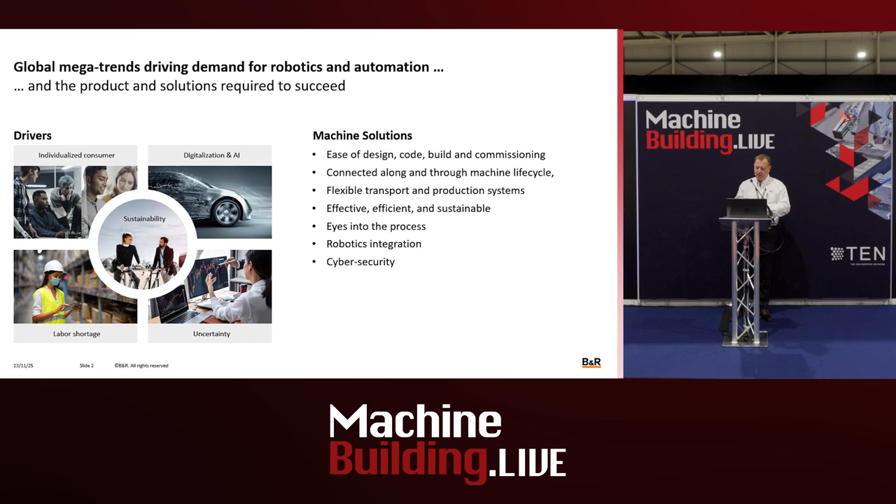So when we talk about along the machine lifecycle, we talk about from a blank sheet of paper, the design of that machine, what that looks like, how it uses raw materials through the entire life of the machine and how long it lasts. And then in the vertical connected through, the machine is part of a line, is part of a factory, is part of an entire ecosystem. And the kinds of data and information exchange that go along with all that, and how do we contextualize it and make use of it and analyze it to make the next set of machines better.

We talk about flexible transport systems. I already mentioned there a little bit tongue-in-cheek about the 6D system from B&R being the coolest piece of technology here. But it's things like that.

It's that kind of technology, these intelligent transport systems, which are very, very flexible and integrated as a part of the process of the machine, to get away from doing something on this machine here, then moving it to another machine to do something else, and then moving it again. What we want are transport systems that become part of that overall process and give you more flexibility—do more with less, quicker.

We also want to have more visibility into the systems these days. We want to know what the machines are doing, and whether we're at the optimum productivity of each piece of equipment. It's not just simple system information like is it running, how many parts are good or bad. It's how long has it been running at that level? If parts are bad, why are they bad, and does somebody have to intervene, or can the machine understand the problem, sort itself out, and quickly respond to be self-supporting and self-healing.

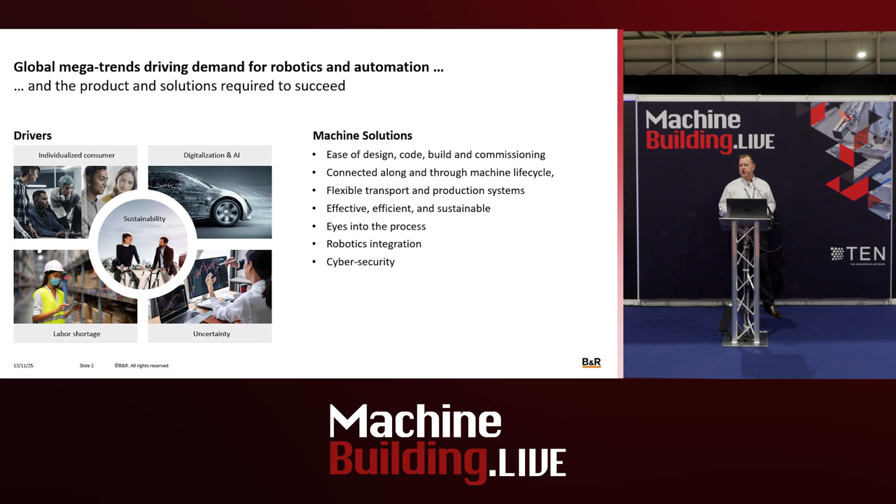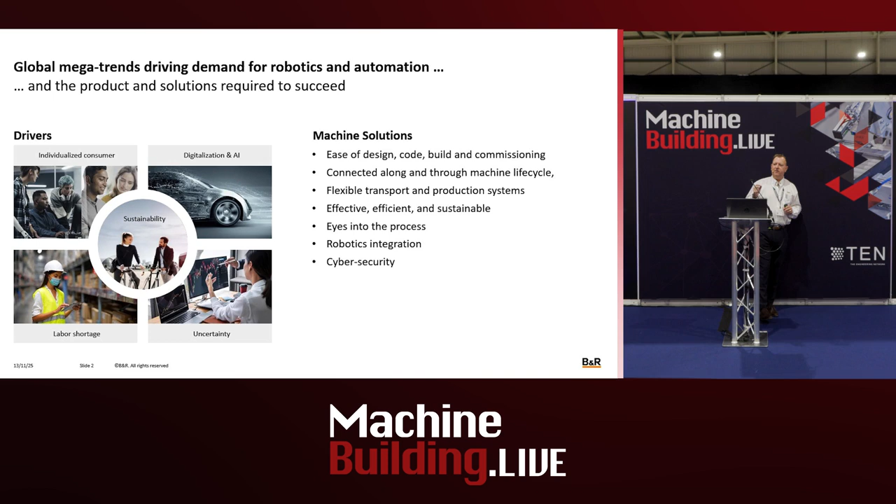We've seen cyber attacks in many forms, most recently the JLR one. Before that this year we've had the Co-op hit, and Marks and Spencer's hit. The impact is huge. Someone said to me at a show similar to this earlier in the year, yeah, but it's a machine, people don't attack machines to get bank details. No, they don't. But if you've got a production line producing pharmaceuticals, producing medicine that's keeping people alive, and people want to be malicious and say, we've hacked into your machine and we're changing the recipe for that product, you can no longer guarantee the product going out the door is what you think it is. That's far bigger than whether they get my bank details or not.

So what are mechatronics? A mechatronics solution is basically an integration of all the disciplines we've known and loved over the years: electrical systems, mechanical systems, robotic systems, computer engineering, high-level data integration, vision systems. That entire ecosystem is a mechatronic solution. It becomes one when those things are brought together in one environment and treated as a single system rather than things bolted together to make it work.

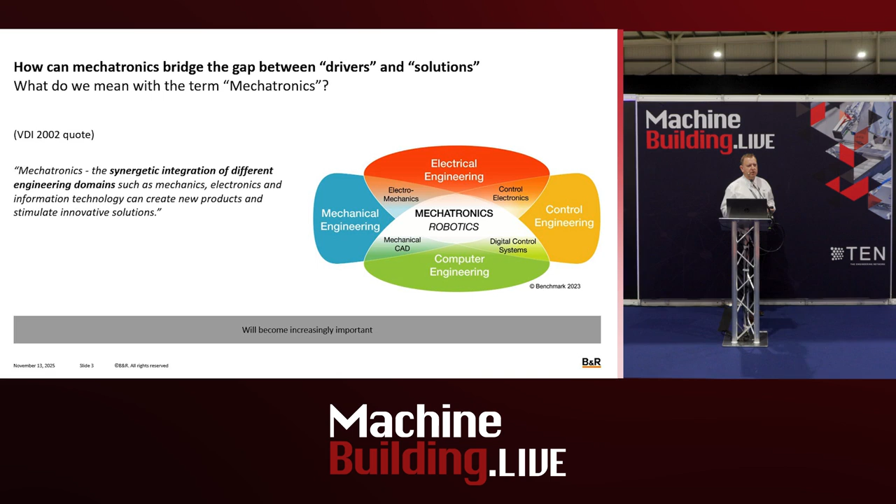Smartphones cannot be manufactured without having mechatronic solutions. It's just not possible. The process, the production lines are integrated.

So what are the components of mechatronic solutions? We talk about simulations and digital twins, and they are fundamentally different. Simulations have been around a long time: you produce a model of something, run it, and see does it do what you thought it was going to do. Yes, no, you make some changes, and check again. With a digital twin, it takes that a step further, allowing you to feed real-world information from physical items back into a digital model. So the system's not running on theoretical data, it's actually running on real data.

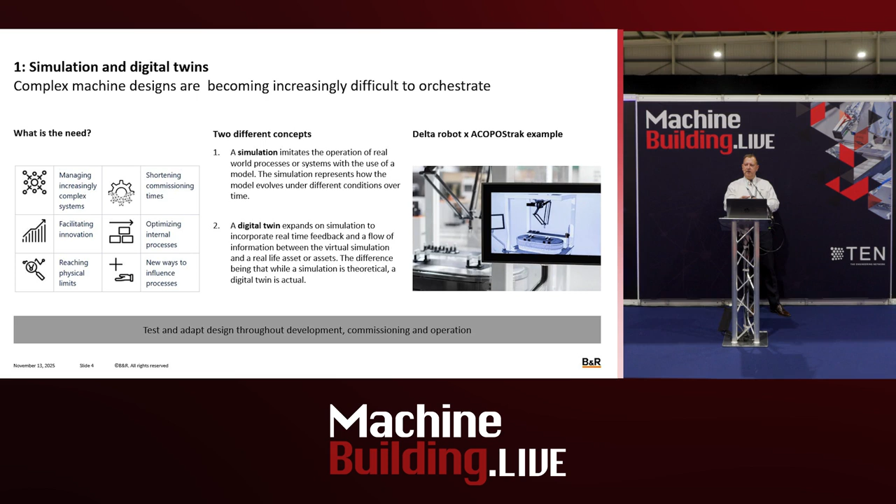We were involved in a project a couple of years ago with a physical production line and a digital twin of that line. We started introducing new modules and additional machines into the digital twin, then feeding that data into the physical line to see what would actually happen and whether we got the production throughputs we expected. What we generally found was that introducing something to solve one problem moves the problem somewhere else. If you can do that in a digital twin, it's cheap and easy to see where you're moving your problems to. It's very expensive to buy a new machine, put it in, and realize you've messed up your production system somewhere else down the line.

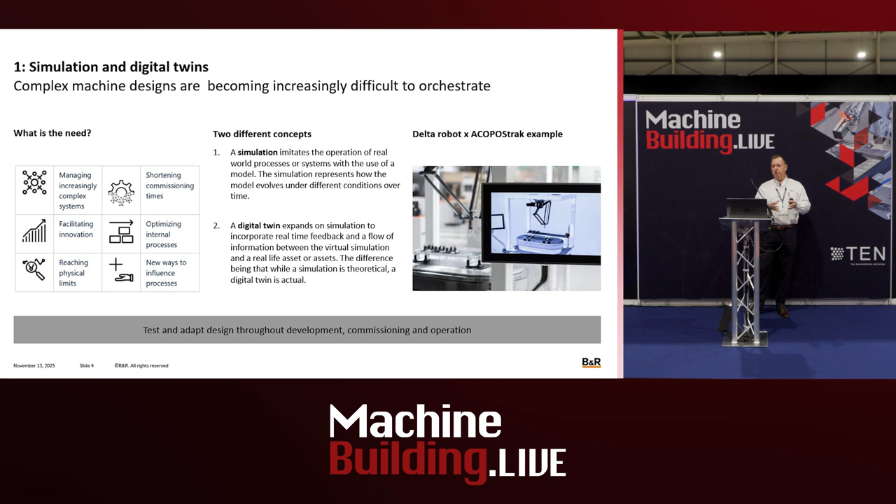So I mentioned before about track technologies and mechatronic transport systems, intelligent transport systems. We at B&R have got 3 different variants of this product, all good for different reasons.

First one is our SuperTrack solution. High payload, individually controlled shuttles. So you go away from an indexing kind of idea where you do something at this point for 3 seconds and then everything moves along and does the next thing for 3 seconds. The real world's not like that. Not everything takes the same amount of time. SuperTrack allows you to move the shuttles individually, high payload, high accuracy.

Downside of SuperTrack is that it's a loop-based system. So whether it's an oval or whether it's a square, can you have a square loop? I suppose technically a square loop. But it's a loop-based system, so your shuttles ultimately always go around this loop.

The step on from there is ACOPOStrak. An ACOPOStrak is an adult version of Scalextric. It's brilliant. Anybody who's any kind of automation geek loves the thought of ACOPOStrak. You get a selection of straights, bends, curves, and you can configure them any way you like, any shape you want. More than that, you can stack them so they're not loops.

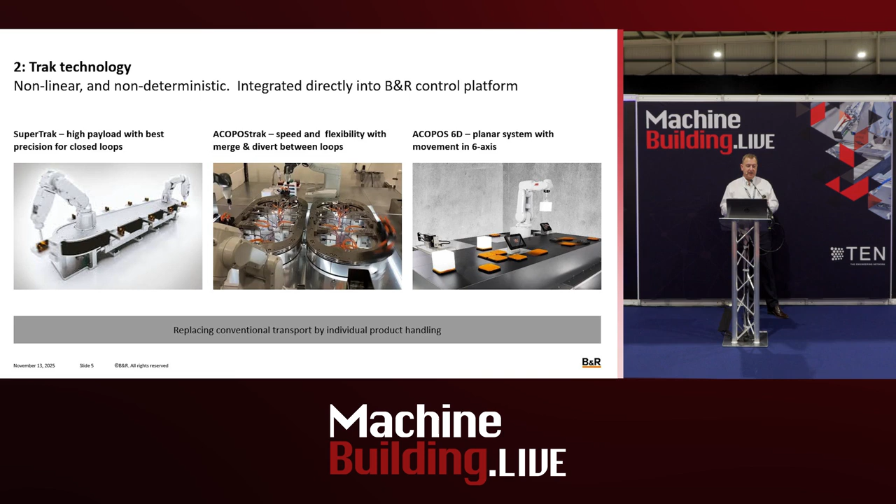You don't need special tooling, because when you want the heavier product, you swarm 2 shuttles together and you share the load across 2. And it's this kind of flexible thinking that's important with mechatronic solutions, and about getting away from transport solutions being seen as, I said earlier, moving from one place to another. It's about being part of the solution.

I mentioned already about integrating robots as part of the solution and not having robots seen as a separate thing. Our machine-centric robotic solution concept basically has the robot programmed through the PLC control system of the rest of the machine. You don't need an additional robot controller.

At the end of the day, what is a robot? It's some servo drives and motors. But we control servo drives and motors with PLCs every day of the week, so why not just connect them to robot axes and do the same thing? You start getting away from needing additional sensors to understand where things are, because it's all controlled and programmed in one place. You've got a very dynamic structure and the system knows where everything is without additional sensors and without the delays that brings in. So it's a more robust system and it's a faster system.

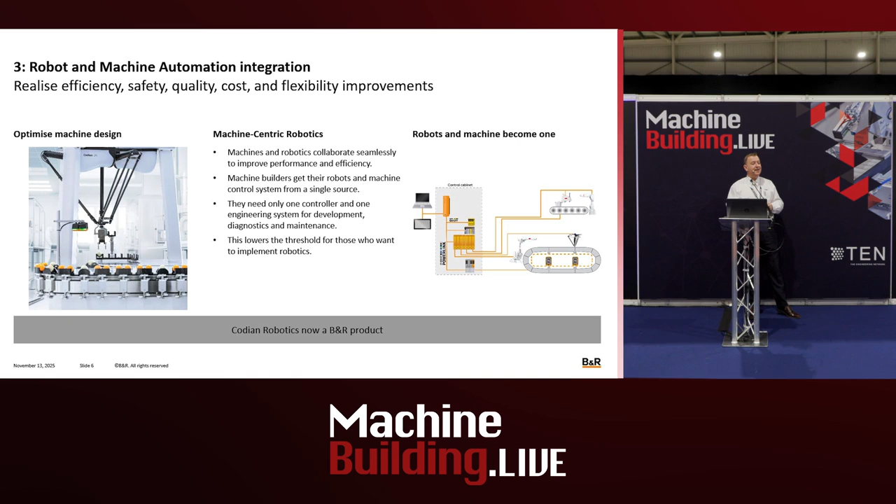The next piece of that puzzle is integrated vision. We use vision in almost all machines. You get something here, you want it inspected, so it makes a sensor, you take a picture, the system processes the image, you get a good or bad, and on you go. In mechatronic solutions, you don't need to do that. It's all programmed in the same environment, so you don't need a sensor to tell you when a shuttle's in the right place to take a picture. You know where the shuttle is, so you can trigger the camera at the right time.

Well, that's great. Is that a bit gimmicky? No. Because if you've got a machine that varies in speed, anybody who's set up vision systems knows they're a pain in the backside if you've got a change in speed. From when you get the signal to when you take the image, that time varies depending on machine speed. So if you've got a very slow speed line and you take an image with a traditional sensor, then speed that machine up, by the time the shuttle comes in and goes away, you haven't made the sensor, you haven't taken the picture, and it's a waste of time. With a dynamic mechatronics solution, you know exactly when that shuttle is going to arrive in the right place to take the image, and you can trigger the camera to do that.

We have a demonstrator in Milton Keynes which runs a system at 5 meters per second, and the camera has no external sensor. We can run that thing really slow, we can run it at full speed, and we never miss an image. Add to that, with our vision system, the lighting is integrated into the camera head itself, and you can strobe different colors. So now you don't have to do different setups if you've got different color products that you're looking at - you can strobe different colors as part of your process. Really flexible.

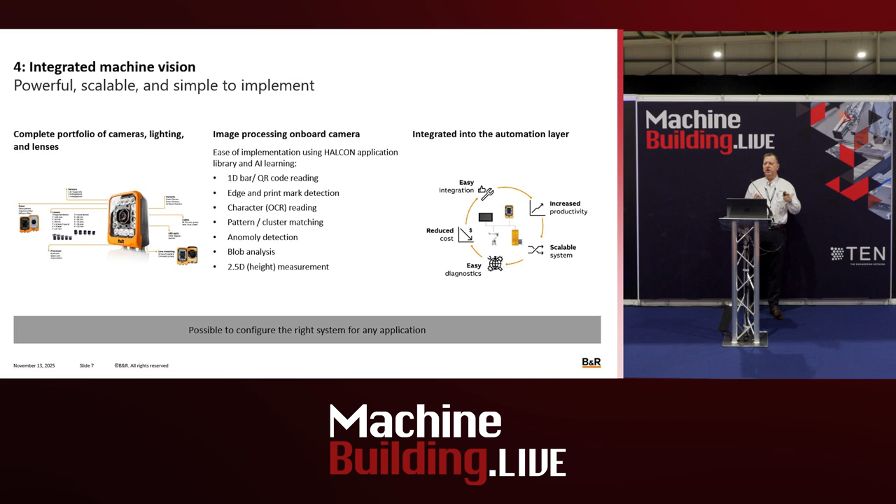The final piece to the vision system from B&R, which is really nice - and again, this is me looking at it from a control systems engineer - if you junk a camera, if you kill a camera, you take it out and plug in a new B&R camera, you don't have to do another setup, because all of the setup parameters are stored in the PLC program along with all of the rest of the PLC parameters and machine parameters. And because the cameras are factory certified, we guarantee you plug the same type of camera in, it will download all of the settings and run out of the box. That's pretty unique.

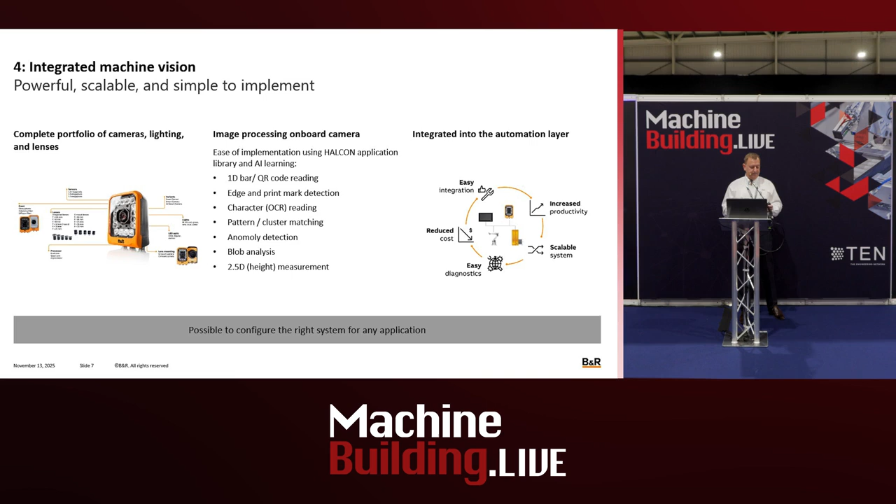And then, of course, the final part to this whole ecosystem is digitization - getting that data from the machine into the cloud, whether that's an on-premise solution or off, getting that data, contextualizing it, making use of it, analyzing it, and improving your processes. We have edge controllers, which are part of the X20 range, which just sit quite happily in your PLC rack and become part of that whole ecosystem.

If you're going to be successful with Mechatronics, you need a solution which can tick all of the boxes for all of these various parameters without having to dive between different types of software packages, different types of data analytics packages, different types of motion control solutions. Do it in one place.